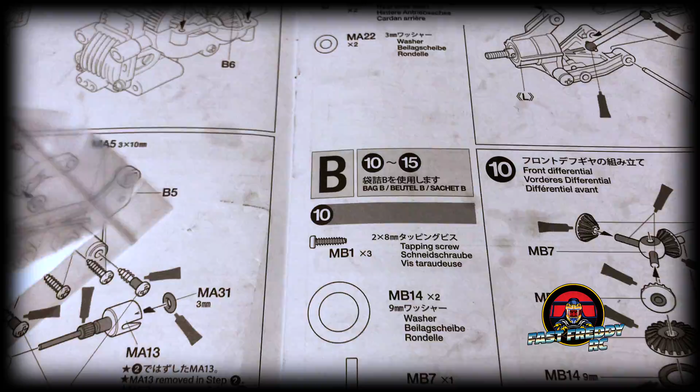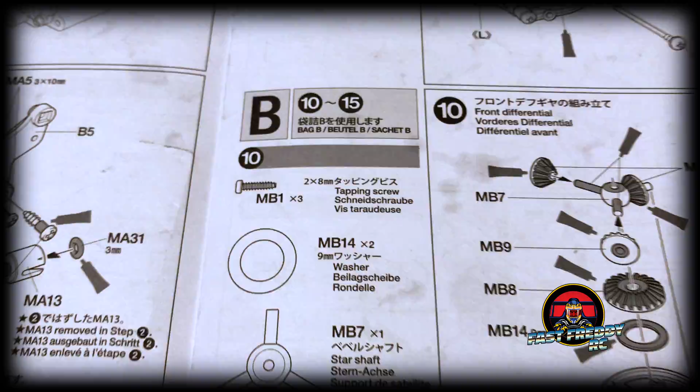So for step 10, the front differential, we're going to move into bag B, which comes out of your big bag of parts. I've already pulled out bag B, so this is what we'll be using. Now just note that when we did the first 9 steps, there will be some extra parts left over. Don't think you messed something up - Tamiya often gives you spares and extras in their kits, so I'll just put them into a toolbox so I've got them for other cars. I've got a whole bunch of extras, so that works. Just note, if you see extras, it doesn't mean you forgot something. So starting with bag B for step 10, I'll grab all these little items, and of course these gears are out of that big bag too, and we'll get started.

So in opening bag B, there were a couple of smaller bags, and you'll see all the gears we need, and then these washers came out of this other bag, which we'll have to open. So that's all in bag B. And then of course we've got these two which came in the big bag, and they're easy to spot. I'll get it all ready and we'll start greasing this up.

Okay, so it's time to get dirty. Now I have the rest of the grease here, but I also have another tube from a different car that I didn't go through the whole tube, so we should be good. So with this, we're going to totally grease up one of those washers.

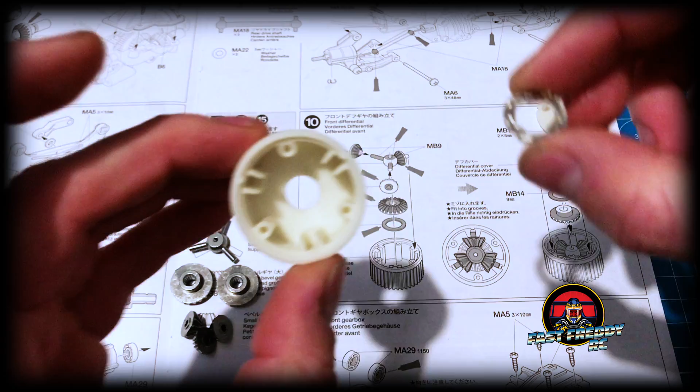So we'll do that and get it all over this washer here, both sides, because it's going to sit right into this gear. Just drop it down there and it's going to sit right down inside. Then we're going to grab one of these MB8s, which is the large bevel gears, and we're going to grease it up.

Okay, and now that's going to sit right down there, and you can see how it looks on the other side. So it's sitting inside. Now the next thing are these little bevel gears and the tree which they're going to sit on. I do things differently with this because I find it easier. I'll grease this up a bit and you'll see what I'm doing.

Okay, and we're going to slide the 3 bevel gears onto them. Oh, better hold it level so I don't lose that one. Starting to get slippy here. There we go, so we've got it sitting like this.

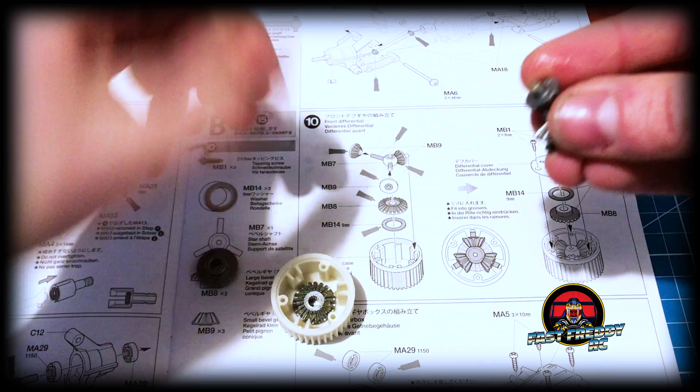Now it shows you greasing all the gears, which is fine, I will do that. But what I want to do first is put a little bit of grease on the ends here, on the ends there, and on the ends there. But rather than grease the gears right there, I'm going to actually put this in. Come on, it's getting slurpy, there we go. Oops, let's grab this.

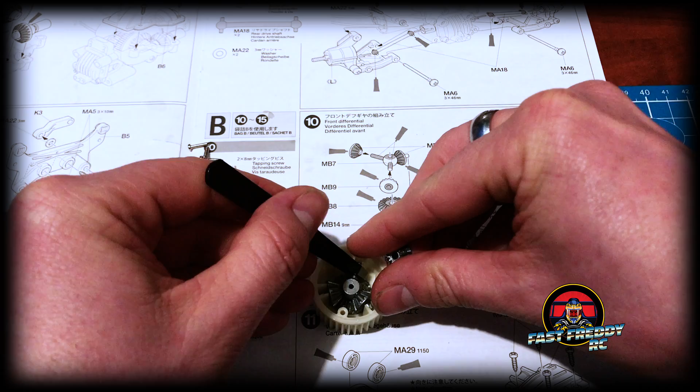And I'll show you why I'm doing it this way. There, so now they're inside and you've got to grease them. But I find this is way easier to grease this way because you can then sit there and spin at the same time that you're putting the grease in. And like I just showed you, things get pretty slick when your hands are all greased up anyway. So by doing this, we get to grease everything up, but also get things rolling.

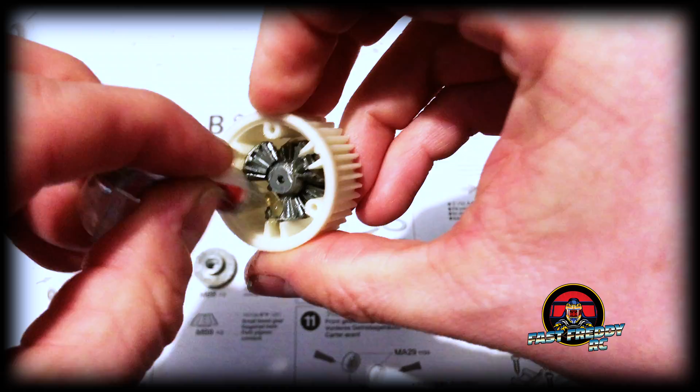And getting to the end of our tube here. There we go. But I like doing it that way because you can see all the grease is going to end up moving around with everything, and it just gets on everything.

Okay, so now that we've done that, you can see there's our diagram, and that's what it looks like. We're now going to do the same thing on the other side. So this all has to be greased.

I mean, I've got enough grease on the other side for what we're going to have it sitting in, but we're going to do it anyway as I run out.

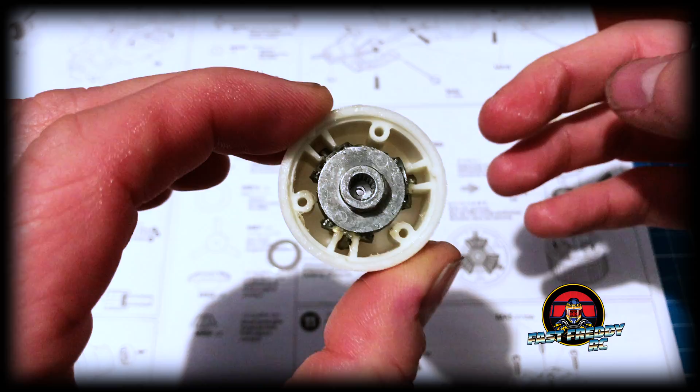Okay, now that's going to sit on top just like that. Then we have our washer, which again we have to grease up, so we'll do that. Grease up on the other side.

And that's now going to be put down right there on top. Then you can see, and actually I'll just wipe my hands down here.

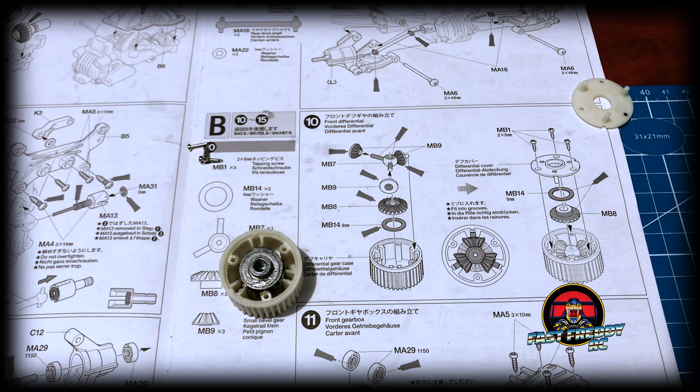We now have that part done, so we need to put this on top, and you can see there's a notch right there, which means that corresponds to the hole that's right there. So if we flip this over, we're going to put that on top, and there we go. So there is our geared differential, and now we just have to screw everything in.

So we have these little MB1 screws. I'm going to take that and put it in, screw it in just a bit. I'm not going too far. Again, I do not like to screw things in fully. I like to do it just like how you would do when you're putting a tire on a car.

You'll see the automotive guys, if you don't do it yourself, go around almost like they're going to either side - not going around in a circle. So I'd periodically grab the next one, screw it in a little bit, screw it in a little bit. I just don't like to cause any binding by screwing one fully, then realizing you might have made a mistake or something's not sitting properly.

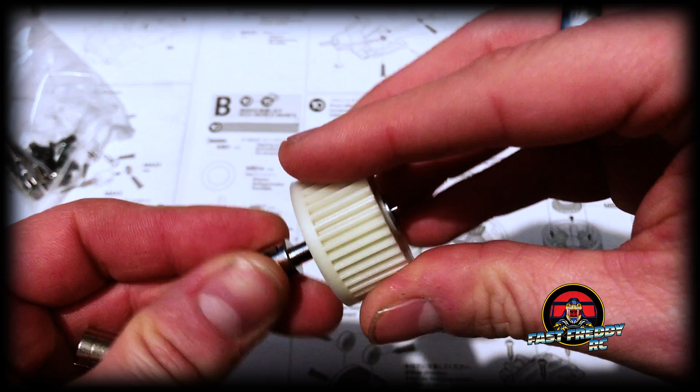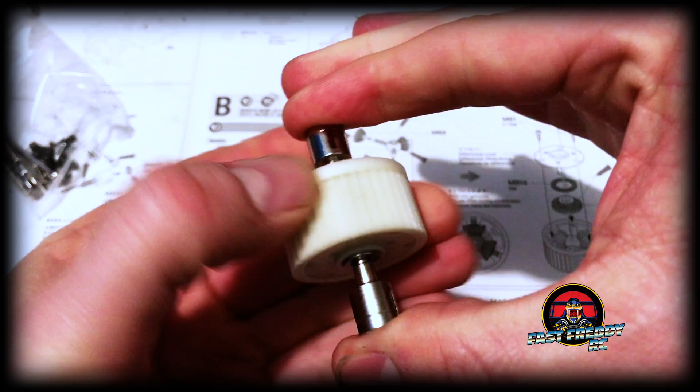So if I put these in and grab both sides, I can feel that the differential is nice and smooth, the gears are working properly, nothing's binding. If I hold this and just spin, you can see the joints are moving correctly, front and back. But if I hold one, I can tell the differential is working fine.

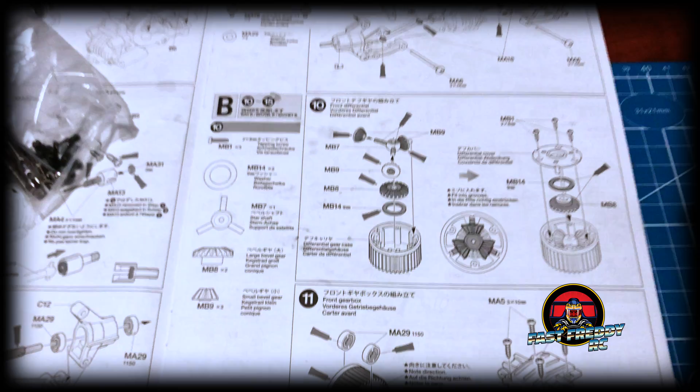Because I can tell you right now, there is nothing worse than building a differential, having something not be right inside it, and then having to take the whole thing apart again to fix it. But it's good, it's working perfectly. So we can now move on to step 11, which is the front gearbox.